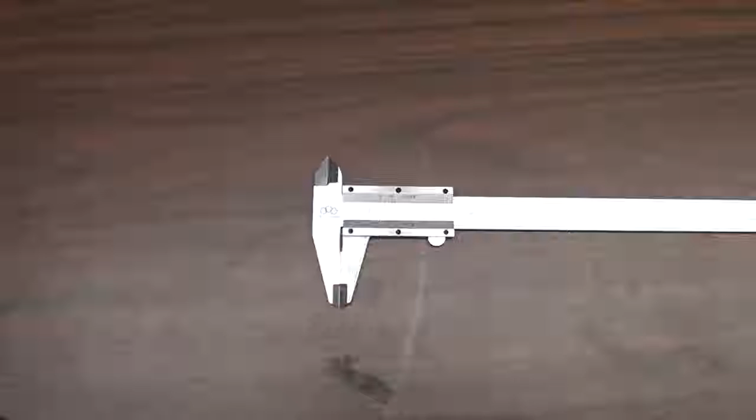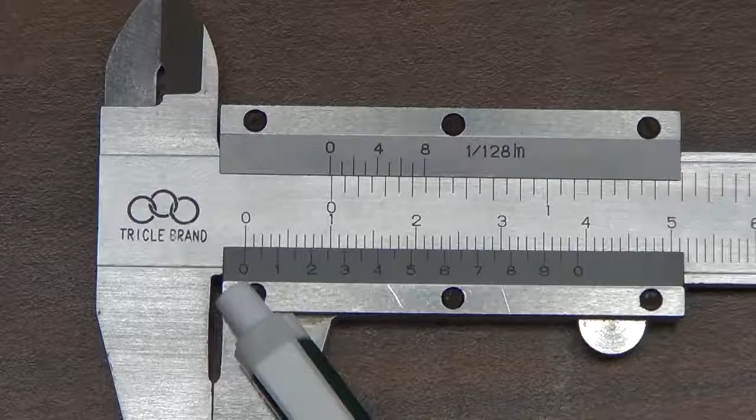Now we'll work with a vernier caliper. The way this works is that there is an upper and lower scale. Here this is the centimeters: 0, 1, 2, 3 on this axis. On the upper we have inches, which we're going to neglect for our use. Then this is the lower scale down here, 0, 1, 2, 3 up to 9, and then 0 again is the minor scale.

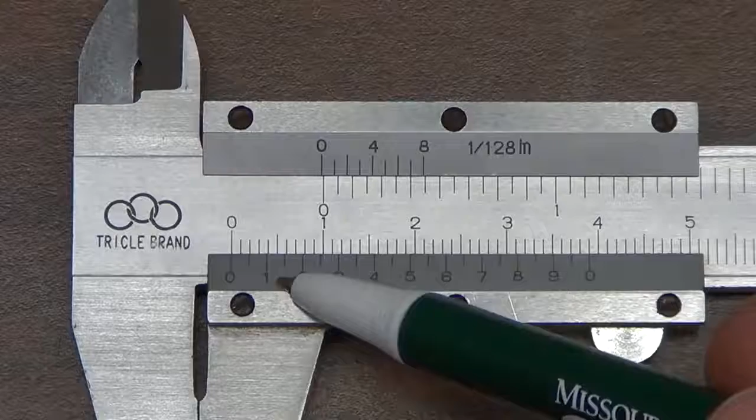When it's shut, the vernier caliper isn't measuring anything, that is, the zeros on the major and minor axes line up. We can see that this 0 on the minor scale and this on the major scale line up quite well. You'll notice nowhere else does that occur, that is, the markings on the minor and major scale line up, except again at 0 here and there.

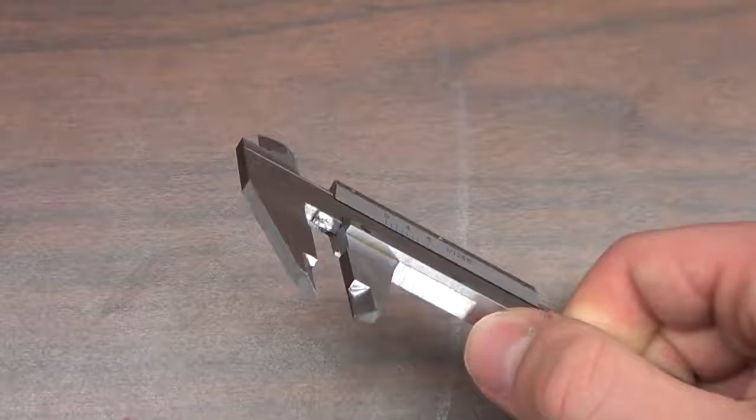We'll put our measurement object here between the teeth of the vernier scale and close it. When we're measuring something, there's a flat side here and we'll want to put our device in that, and then close it with a little bit of pressure. Then with that value, we're going to see what the measurement is.

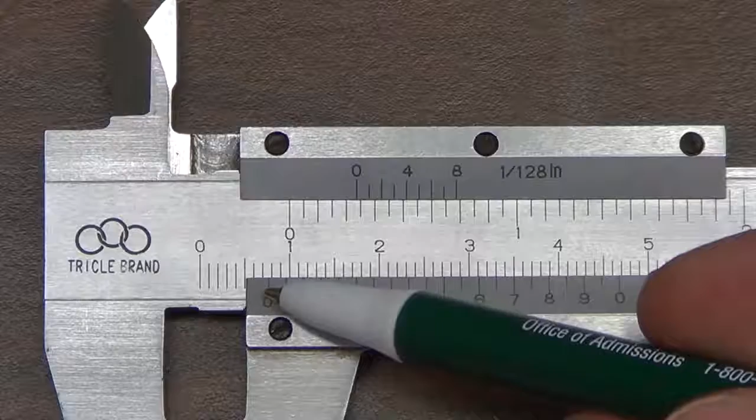On the major scale, it's the question of where does the 0 on the minor scale line up with the major scale. So here we have a 0 on the minor scale, which is a little past this hash mark here. So that's 5, 6, 7. It's a little more than 0.7 centimeters. And the question is, how much more than 0.7 centimeters is it?

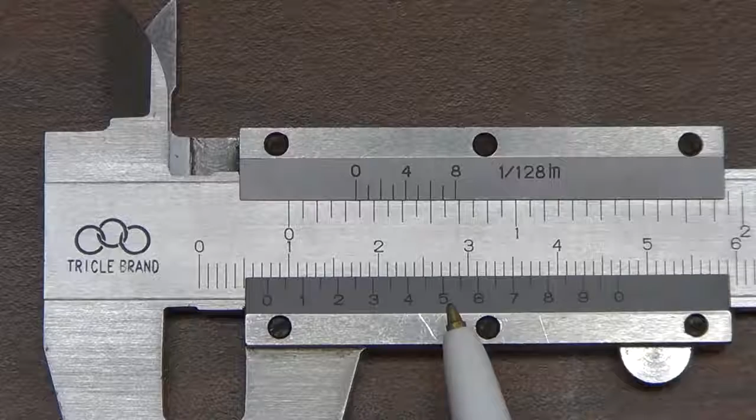Since the 0 here doesn't line up with the major scale exactly, we need to find where on the minor scale it does. So there's no match here until we reach, say, the 6 value. So on the minor scale, the 6 mark lines up pretty well. You could even say the 7 mark lines up better. So we'll take this 7 as our minor scale measurement.

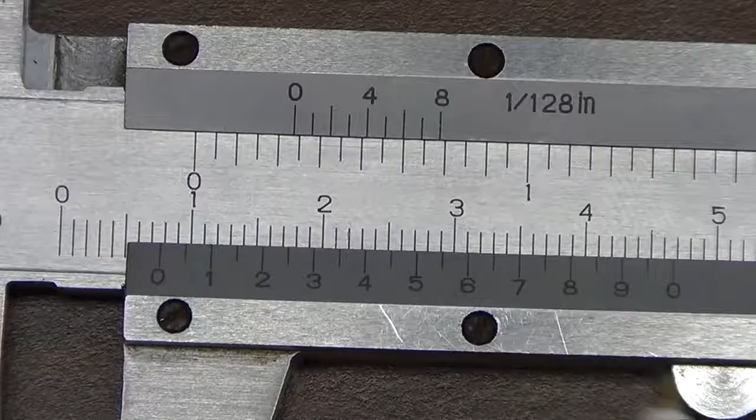Now the question is, how do we combine this 0.7 centimeter measurement on the major scale with the 7 mark on the minor scale? The answer to that is over on the far side of our caliper. There's a little marking that says 0.05 millimeters.

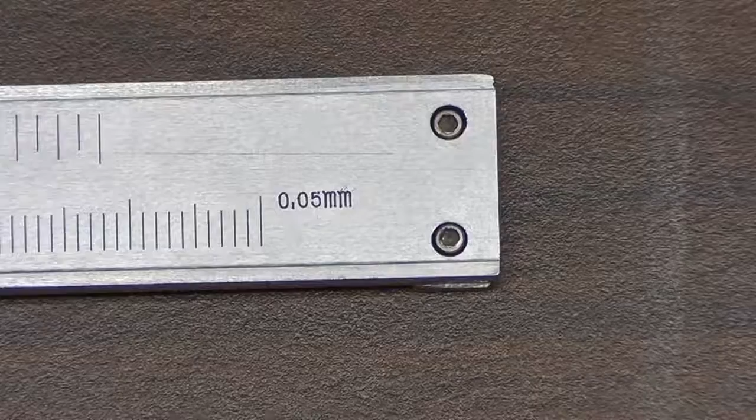This tells us the smallest unit of measurement for the caliper. So now when we look back, this 0 on the minor scale is somewhere between 0.7 and 0.8 on the major scale. So this gives us some confidence that our measure is correct.

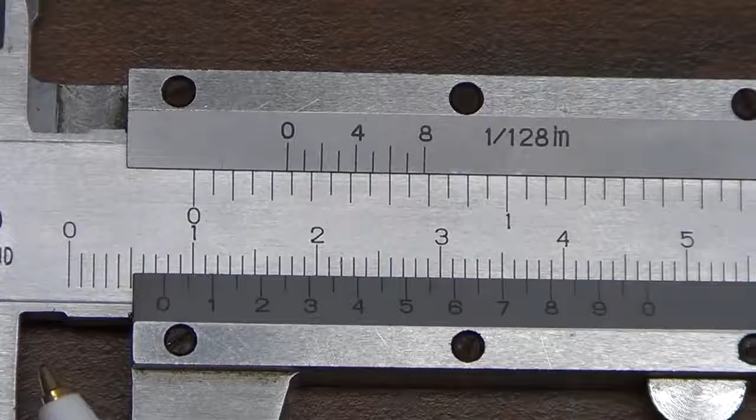Now that we know the smallest unit of measure on the minor scale is 0.05 millimeters, that tells us what this 7 means. Each of these small marks from here to here is 0.05 millimeters, and since this is 7, and there are 2 marks per increment, there are actually 14 of these small measurements.

The way we'll combine these sets of measurements, the 0.05 millimeters on the minor scale as the smallest measurement, with the major scale of 0.7 centimeters, is we'll take the major plus the number of minor increments, in this case 14, and then multiply that number times the smallest measure. So what we get back after we convert to the correct units of centimeters, in this case, is 0.77 centimeters, with an accuracy of plus or minus 0.005 centimeters.

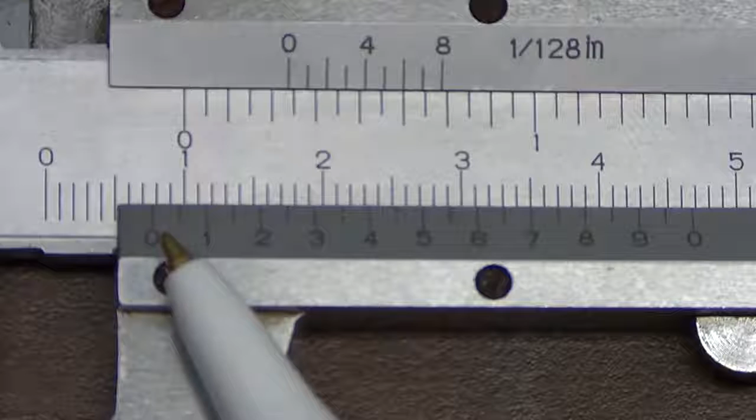As a check, this makes sense because the value should be between 0.7 centimeters and 0.8 centimeters. And if we look back at our original measurement, we see that our 0 mark on the minor scale is close to the 0.8. So 0.77 centimeters makes sense.

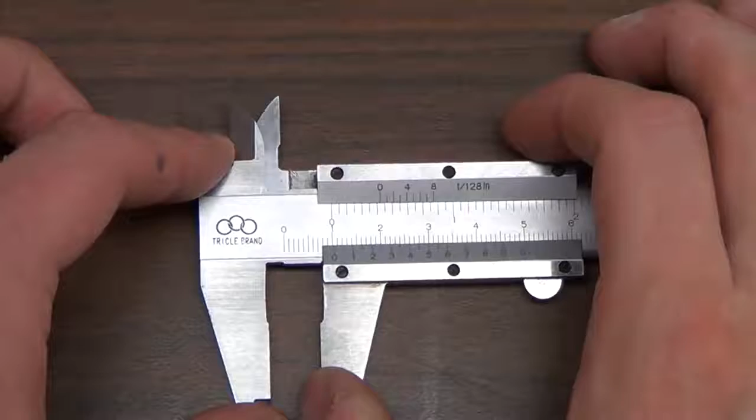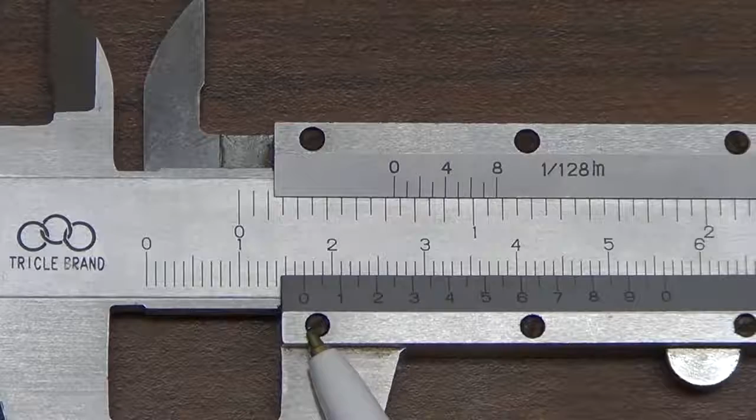Now, as an example of what happens if our scale is slightly different, if we're using a different measure and we come upon the case where the 0 on the minor scale lines up with an increment on the major scale. For instance, now I see that the 0 on the minor scale lines up very well with 1.7 on the major scale.

What that does for our calculation is we still have a major scale of 1.7 centimeters, but now our minor measurement is 0 increments, and we multiply that times our smallest measure of 0.05 millimeters. What we get back is a more precise measure of 1.70 plus or minus 0.005 centimeters.